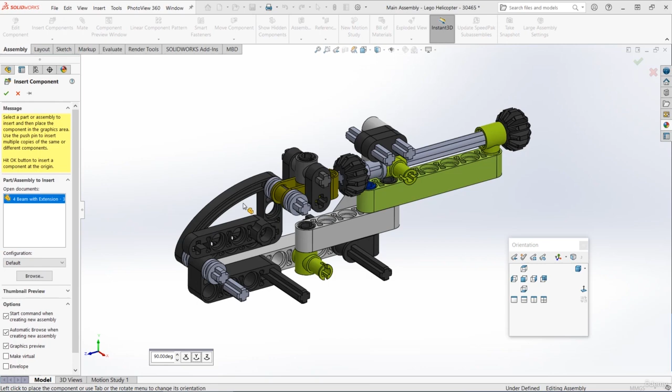Now we know it attaches in this place, so I'm going to choose a circular face here on the axle and also inside that hole on the 4-beam, make those concentric, and lock the rotation. I'll also bring the part into the correct distance by choosing the inside face here and the outer face here and making those coincident.

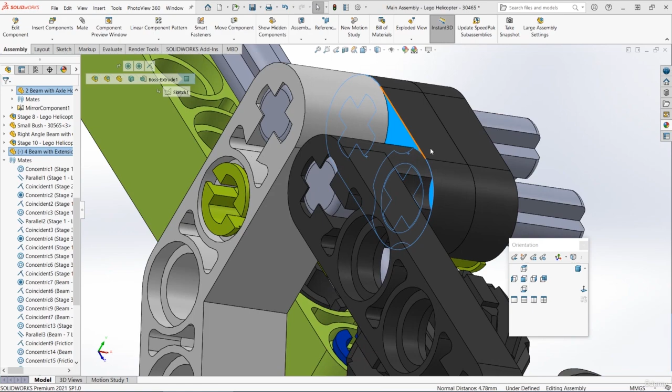So at first glance it looks like our stage is completed. But actually, if we look more closely, we've got some problems. The parts from the different stages don't quite fit together here, and if we look from the side, it's really obvious - this axle and this axle hole don't line up.

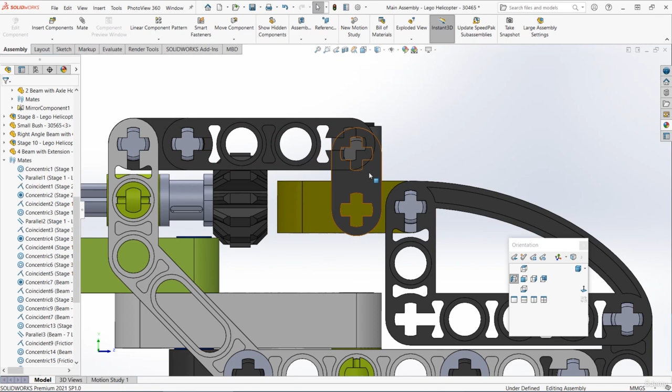Now some of this might be due to the flexibility of Lego. When you make this in real life, the parts are going to move around a little bit and maybe bend slightly, and that will allow these small changes to fit together. It might also be due to small differences in measurement - for example, one part could be measured 0.05 millimeters too large, and over a number of parts that small difference will add up.

But if we look at the side of our assembly here, we can see something obviously isn't quite right. It's not just a small difference there. So let's do a little bit of troubleshooting - let's get the measure tool from the Evaluate tab and start to try and see what the problem is.

So we know that the nominal or usual size between sets of holes should be 8 millimeters - that's a pretty standard measurement throughout Lego. And just looking at our assembly, it looks like all of this bit on the left is a little bit too far back, too far to the left as we're looking at it now.

So if we try measuring from here to here, it's coming up at the bottom as 16.97 millimeters. Now if we're expecting 8 millimeters between holes, we'd expect that to be a multiple of 8, so it should be 16, not 16.9. So maybe we've got some kind of problem with this corner beam part with that diagonal section. If we made that shorter, it would bring everything forward and down a bit, and that seems like it would solve a lot of our problems.

So let's open that corner beam part and have a look at it more closely. Click on the part and press Open Part, and then when we're in the part, let's edit that first sketch, the beam sketch. Now the problem is, when we first made this part, I was a little bit lazy.

I didn't measure everything - I assumed that because the distance between these holes along the bottom is 8, it would be the same 8 millimeters between these holes going up the diagonal here. But if we think about this logically, because of the angle, that won't work properly.

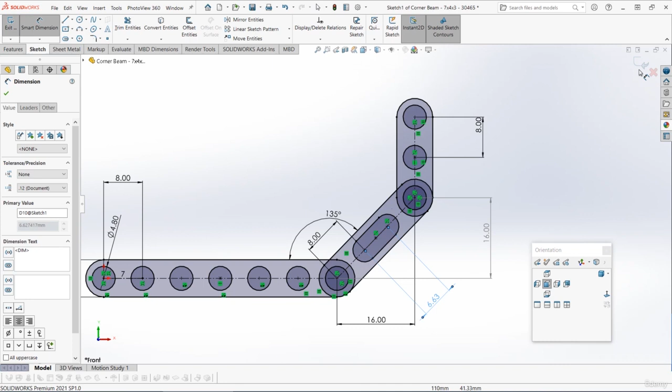And this is the beauty of SolidWorks - you can go back to any stage in your model and make changes, and that can drag through to your final finished assembly.

You don't have to start everything again from scratch. So now let's go back to our assembly and see how that affects things. Your assembly should update automatically. If it doesn't, you can rebuild by pressing Ctrl B or pressing Rebuild up here.

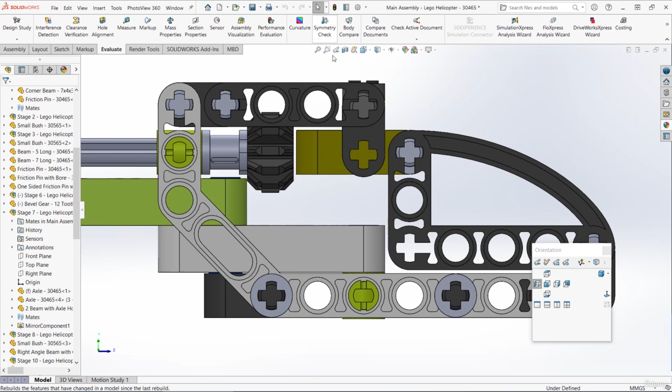If we zoom in a bit, we can see we've no longer got a clash on the gear that we had before. And also it looks like the axle and the axle hole are lined up left-right as we're looking at it, but they're still a bit off up-down. So we're getting closer to the correct solution, but we've still got a bit of a problem.

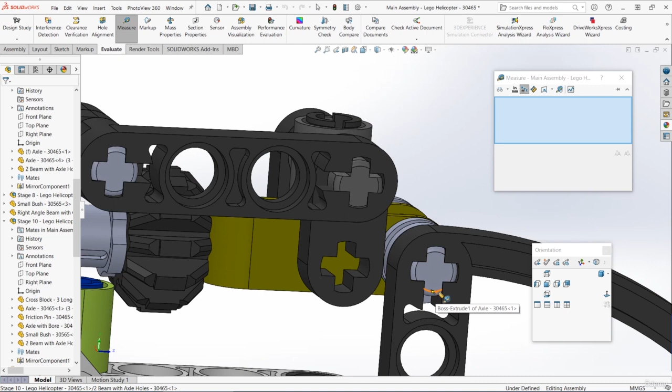So let's get the measure tool and we'll see where we're still going wrong. Let's measure between these two axles here. So the distance here should be 8.0 to fit in with that standard 8 millimeter spacing, but it's actually coming out as 7.6. And the reason is this axle with a bore part is actually sitting too far down in that subassembly that we made in the last video.

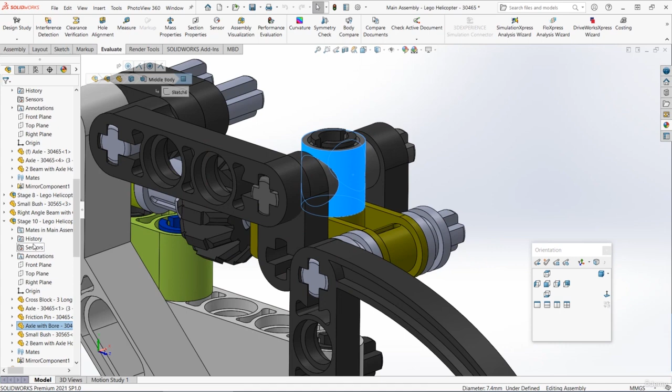Let's open that subassembly and fix this. So I'm just going to click on one of the parts so I can see where the subassembly is in the parts tree, and then I'm going to click on stage 10 and press Open Subassembly.

So back in our subassembly, the vertical distance between this circle and this circle should be 8 millimeters. If we get the measure tool, we can see that's 7.6. So we need to move that section up 0.4.

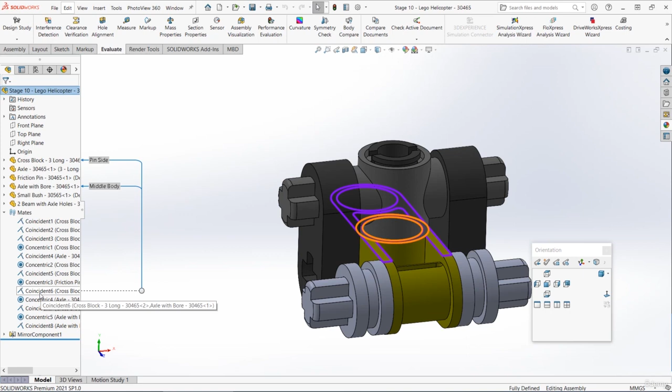To do this, I'm going to expand the mates. I'm going to delete that coincident mate that we've already added. You could also just edit it and change it to a distance mate. If you hover over the mates, their surfaces should be highlighted, so you should be able to find the correct one.

Now, if we try to select the two circular faces and make those a certain distance apart, 8 millimeters, then you'll find that we can't really do this because the distance mate is trying to set the shortest distance between them, which will be a diagonal line. We actually just want a vertical line.

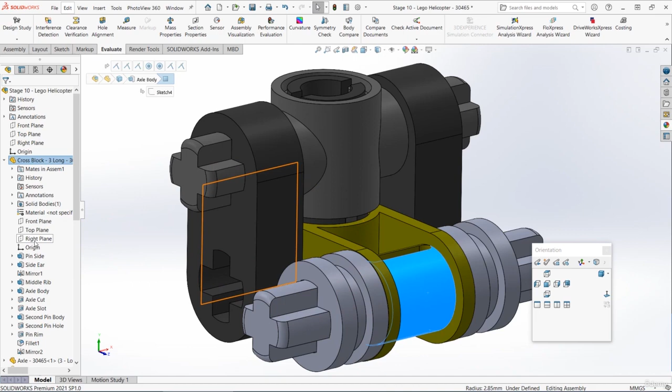So if we can't add a mate directly, instead we can use the planes. Let's find the plane that goes down the middle of the axle with bore part, and also find the plane that goes down the middle of the cross block 3 long part. And then we can just add a distance mate that's 8 millimeters there.

So we do have a small gap in between those two parts now, but we know that the axles are at the correct spacing. So now let's save that subassembly. Let's use Control Tab to go back to the main assembly and see how we're looking.

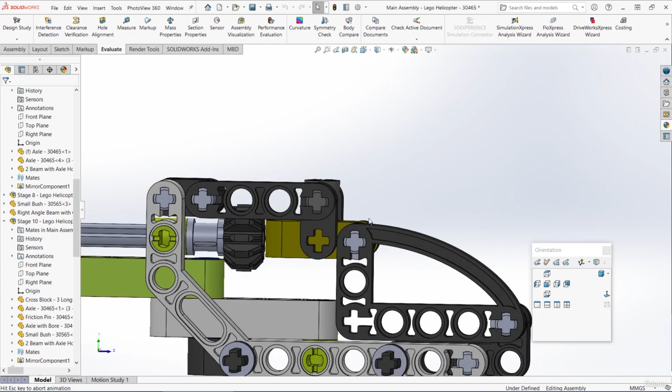Right, we can now see from the side that the axles are lined up correctly. However, we've still got one final issue. This axle part with the center bore seems like it's slightly too wide because it's making this 2 beam with axle part clash with that latest 4 beam with extension part that we added.

Let's open that axle with bore part and have a closer look at it. Now if I double click on that middle feature, we can see the width of it is 9.6. And actually it's another case of me being lazy. I didn't measure this properly. It should actually be smaller for this one. It should only be 7.4, which is that standard width of the block.

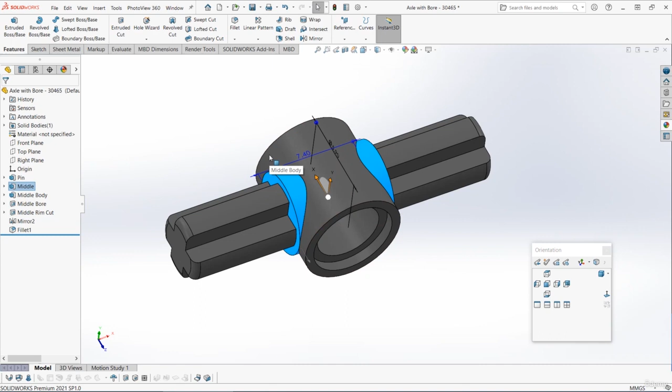So you should be able to double click on that 9.6 and then change it to 7.4. If you can't do it directly there in the graphics area, you can also edit that middle feature and just change the width of the midplane to 7.4. And then the diameter of the actual circle should also be a bit bigger. So if you double click on that, it should be 7.4 as well, not 5.9. So it should look more like this.

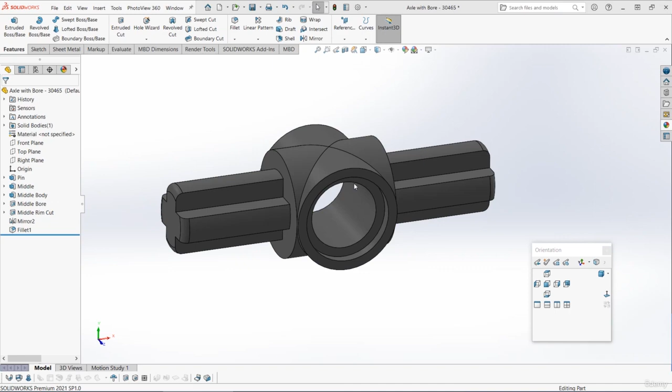Now let's save that part and go back to the main assembly and see how it looks. And yes, now we can see everything lines up correctly. We do have a small gap in there. That's okay, that's just for the tolerance between the parts, maybe where they've been measured slightly differently to each other, or maybe just to allow them to fit together properly without being too tight.

So this stage is now done. I just wanted to show some examples of, even when you're making parts that you think you know the dimensions of, always be careful and maybe double check your dimensions as you go.

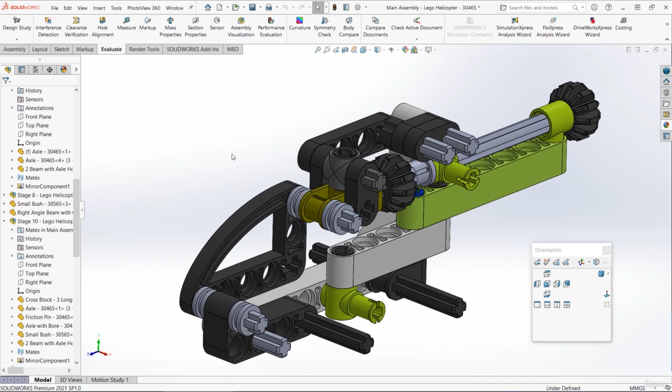In the next section, we'll go on to stage 11, which only involves 2 new parts, and they're both pretty simple.